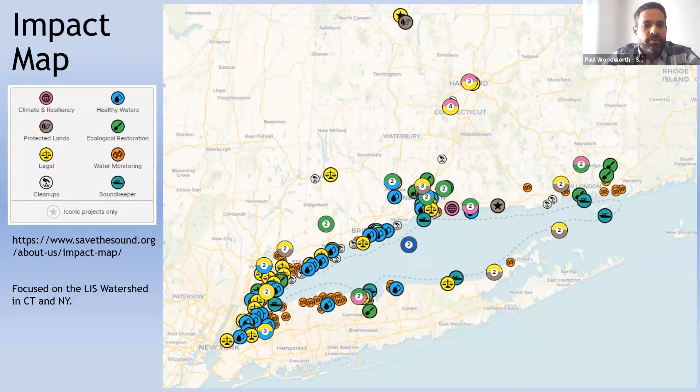We are a geographically focused organization, so we are focused on the Long Island Sound watershed in Connecticut and New York, which includes part of New York City, the Bronx, Queens, and parts of Long Island, the North Shore of Long Island, and all of the state of Connecticut. And of course, the watershed goes farther north, but we pass off responsibility to some of our partners that do more work in the upper parts of the watershed. So we are very focused in Connecticut and southeastern New York.

Our ecological restoration team has a handful of approaches we're currently most focused on. These are roughly broken down into watershed planning and stormwater green infrastructure type work, dealing with non-point source pollution, rain gardens, and infiltration. We also deal with coastal resiliency and living shoreline type projects involving marsh restoration, oyster habitats, and a new experimental phase of eelgrass habitat restoration. And the work we're also very active in is loosely called aquatic connectivity and fish passage work.

That's primarily road stream crossing assessments, looking at culverts and dam removal, which is the focus of today's talk. If anybody has any questions as I'm going, feel free to raise your hand or interject, maybe to the chat.

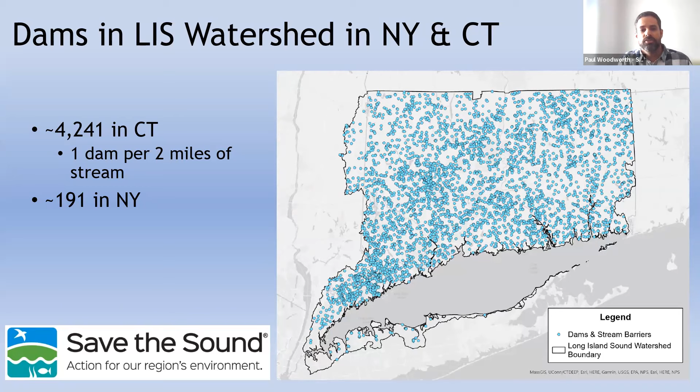And it's not atypical. Massachusetts has some portions of the state that are even more dense, and much of southern Maine through New England into the mid-Atlantic, and even some southeastern states, have similar densities and settlement histories that drove the establishment of so many dams.

So from that, we have to emphasize that not all dams are created equal. Most dams have a single function, and they vary widely. We have hydroelectric dams - this example here on the Housatonic River.

This is such a sizable structure, the dam has a name, and the pond or lake behind it has its own name. Sometimes people know the lake but don't know the dam. It's such an enormous footprint on the landscape, and that is an active hydropower facility. It has a power generation unit, connected to the grid - you see power lines coming out of it. Very big, very powerful, and providing a very valuable service to society.

To the right of that, we have a water supply reservoir on the east branch of the Farmington River. This is a beautifully maintained, beautifully built, enormous structure, with massive amounts of water coming out of it and basically being funneled to the Hartford region. So a valuable resource here.

To the lower left, we have a flood control dam. This one in particular is the Mad River Dam, just upstream of Winsted, built after 1955, when the flood of 1955 destroyed Winsted. And those dams also are very large on the landscape.

However, the vast majority of those dams I was looking at on the map previously are basically relict dams that were hydropower technically, but not hydroelectric - never really electrified, just formerly what we call hydromechanical. They were basically connected to a mill dam or mill powerhouse and used for either cutting lumber, grist milling, or textile mills - that sort of activity over the years since colonization and through the Industrial Revolution. These distributed power sources were essential to early American colonial history and expansion.

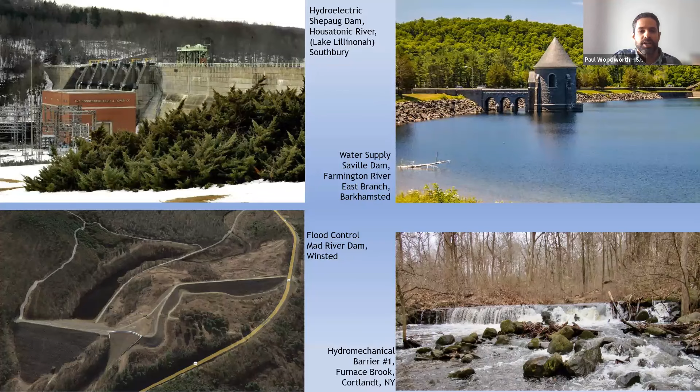So these are the kinds of structures we most often look at. The fact that this dam is only 5 feet high, not much taller than the average person, doesn't matter from a fish's perspective - it is still a complete barrier to fish migration. So we still look at these structures as having a pretty detrimental impact on our systems, and I'll get into more of that.

The ownership of these dams is also a pretty interesting phenomenon. You see the vast majority of these, 75% or 78%, are in private hands. Some of them are tribal, although that's a very small percentage. Also a very small percentage are federally owned - that's usually an Army Corps structure, a flood control dam.

Some are in public utilities. I should tell you that this dam database, and actually the map I showed you, did not include water supply reservoirs. Those are not even mapped, for public safety reasons.

Everybody can easily find it out, but it's not something that's put up for easy download and viewing by Connecticut Dam Safety. A lot of this information is publicly accessible. You can go onto the Connecticut DEEP's website for dam safety, download the database, and see it. They also have a really good viewer, where you can pan around the state, zoom in and zoom out, just like Google Earth or Google Maps, and find a dam in your neighborhood and learn some basic information about it.

I have two pictures here. One on the right is actually a dam on the Bronx River. It doesn't have much of a name or purpose anymore, but it's still a full barrier to fish migration. The one on the left popped up in one of our culvert assessment projects, where it was looked at as basically a culvert under a road. But actually, that drop structure with water falling into it connects to a culvert that goes under a road, and technically that is a dam, sure enough it's on the dam safety database. So that's another example of a fairly small structure that is still considered and regulated as a dam.

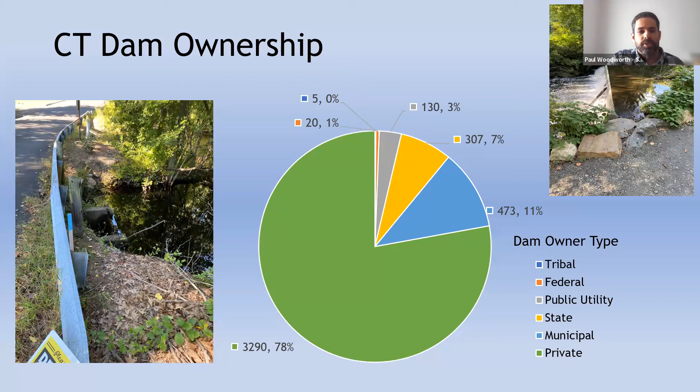Dams are regulated by the state. They are given hazard classifications, based on how much damage would occur if the dam were to suddenly fail, such as damage to land, roadways, or structures, possible loss of life, or economic loss. Connecticut DEEP has a lettering system unique to the state, but the general breakdown is similar: negligible at the lowest end, then low hazard, moderate hazard, significant hazard, and high hazard dam.

You can see from this chart that most of these structures, about 45%, are low hazard. Another 12% are negligible, 17% are moderate, and just a very few are actually in the high hazard classification.

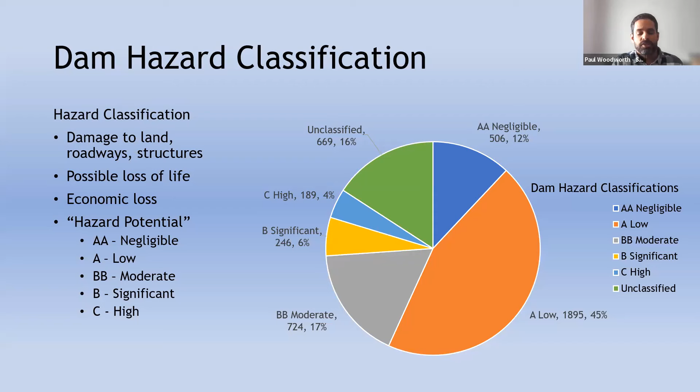I should be very clear here that hazard classification is a very different thing than the condition of the dam. It's not something that says this dam is not good, so it's a high hazard for that reason. High hazard really has nothing to do with the actual condition.

So those two concepts are separate but related. Typically, to establish the condition you'd hire an engineer. They would look at the spillway, the abutments, the earthen berm, the appurtenant structures, the raceways, anything associated with that dam, and look for signs of failing concrete, cracking, spalling, vegetation growing on an earthen section of a dam, or sloughing of the soil anywhere, and then give it a rating of good, fair, or poor condition. Let me know if there's any questions about that. I'm going to keep moving on.

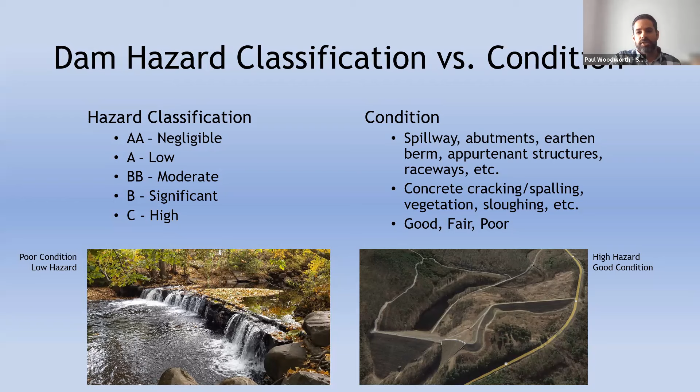Dams impart an impact on the landscape. I've broken them down into fields of science, which may not be the most receptive framing for an audience, but hydrologically and hydraulically, they basically alter the flow regime. They stop water, turning a flowing river into a linear impoundment or some kind of a lake, so it drastically alters the hydrology and hydraulics of a site and of a watershed.

They also have a geomorphic impact. This happens to be my area of interest, so I like to talk about this. Dams trap sediment and don't usually allow sediment to convey downstream. That sediment accumulates in the impoundment, along with any contamination that might come with it, burying the substrate in the impoundment. The downstream effect is a cascading effect of sediment deprivation. Streams need to carry water, sediment, and organic debris, and if you cut off the sediment, that results in a sediment deprivation condition that starves the downstream reach.

It's sort of a sediment-starved scenario, and it actually exacerbates channel erosion downstream of dams. So that's a downstream and an upstream effect.

The other effects are physical, chemical, or water quality related. They tend to increase temperature, they tend to trap water, and they make it more slower moving.

They give it more exposure to the sun, so that increases the temperature, and that also has the effect of decreasing its dissolved oxygen. Most aquatic organisms consume oxygen through respiration, through gills or something similar, and if you have deprived dissolved oxygen, then you're going to have an ecological impact in that way too.

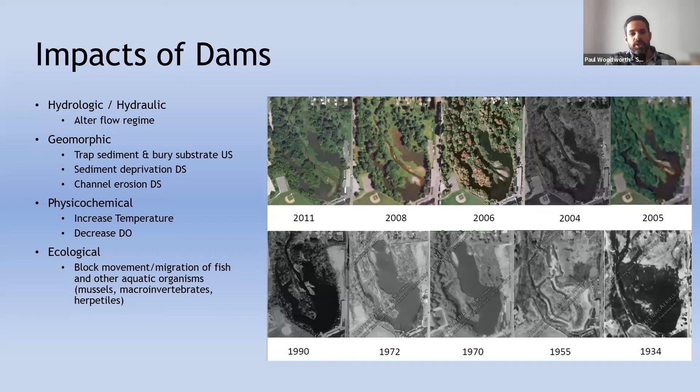Now, converse to that, with all those impacts related to dams, dam removal can actually reverse a lot of that. By removing a dam, you get an immediate response in terms of restoring free-flowing conditions.

You can uncover river habitat, and you can start restoring river habitat downstream by restoring the flow of sediment. You can reduce temperature and increase dissolved oxygen, and you almost immediately restore the movement of resident fish and the passage of migratory fish.

Many of our projects are being funded with the intent to restore populations of migratory fish in our area. We have 5 primary migratory fish that we are focused on: American shad, blueback herring, alewife, sea lamprey—which are native to the northeastern coast—and American eel.

So those are the species that we are often looking at in terms of trying to reestablish fish runs and reestablish their populations in Long Island Sound.

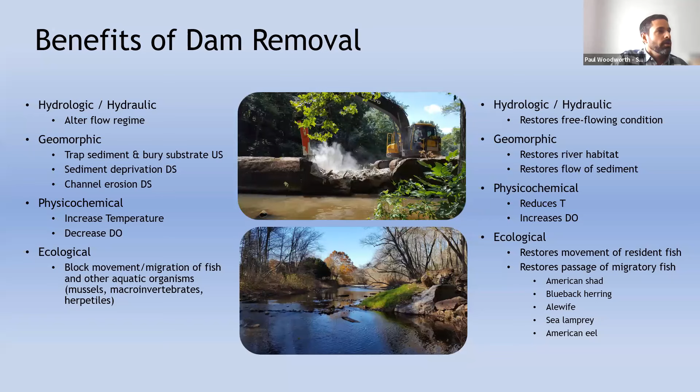Related to those benefits, we see dam removal as ecological restoration. Ecological restoration is being spearheaded on a global scale by the Society for Ecological Restoration. Several of my colleagues are members of that; we're in the Northeastern chapter.

This is the organization that has risen to the moment in terms of establishing standards for ecological restoration, definitions for it, and guidance documents to try to measure and improve upon the science and practice of ecological restoration.

They define ecological restoration as the process of assisting the recovery of an ecosystem that has been degraded, damaged, or destroyed. Ecological restoration aims to move a degraded ecosystem to a trajectory of recovery.

I think it's important to note that dam removal doesn't necessarily immediately restore an ecosystem. It's going to take many actual dam removals to set the river back on a trajectory, to get fish populations back up to where they were prior to the damming era or dam-building era of the Northeast.

So it's a long-term process that occurs long after the yellow machines have left the site.

To convey some of this, we look to this ecological recovery wheel, which helps us identify the positive impacts that dam removal can have. It can have a dramatic impact on species composition, structural diversity, ecosystem function, and external exchanges.

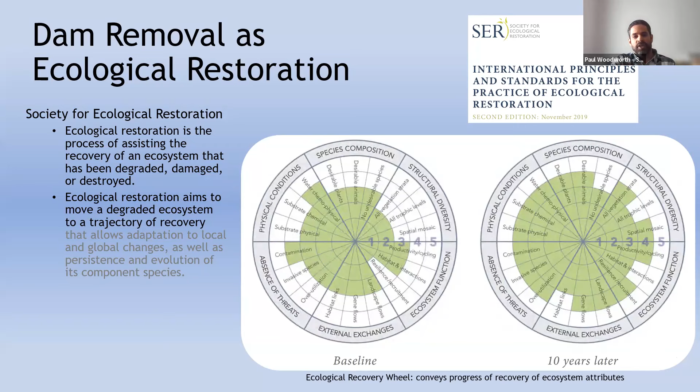So now I'd like to move to some of the projects that Save the Sound has completed, some of our successful projects. These happen to be ones that I worked on when I was in consulting too, so I have a little bit of overlap with them.

This is the Clark Brothers Dam on the Quinnipiac River in Southington, Connecticut. This is the lowhead dam I've been talking about, in decrepit condition. To the right is a picture of that exact dam post-removal, with the river flowing through and the structure out of the way.

This is an aerial view. The aerial to the left is with the dam in place, and the aerial to the right is with the dam removed. You probably can't even tell where it is. I'll give you a hint with my mouse right here, but this is the dam right here, and this is a bowling alley right to the left of it.

It's a very sinuous stretch of the Quinnipiac River, except for this stretch that was most definitely straightened at one point, probably during the creation of that highway. The removal restored passage to the site, but had very little impact in terms of the loss of a lake or lakefront property. Nothing that dramatic happened.

Because I'm a geomorphologist and was involved in the design process, I love to look at these sites and projects through the eyes of the river profile. It's a very explanatory, powerful tool for estimating or evaluating the impacts of a project and predicting how the river is going to respond.

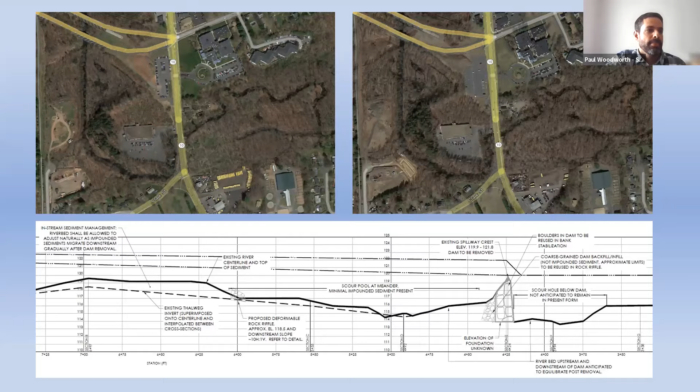I'm going to switch now to another project. We call this the Hyde Pond Dam removal project. This is on Whitford Brook, on the border of Groton and Stonington, and actually a little bit of Ledyard. So it's right up there.

Whitford Brook had been known to have a really strong fish run, including sea-run brook trout and sea-run brown trout, but also the migratory species I was speaking of. It actually had a fish ladder on it—you can just barely make it out in this photo. However, the dam was in such poor condition, leaking so much that even at low flows there was barely any water going down the fishway. So the fishway was ineffective because of that aging structure.

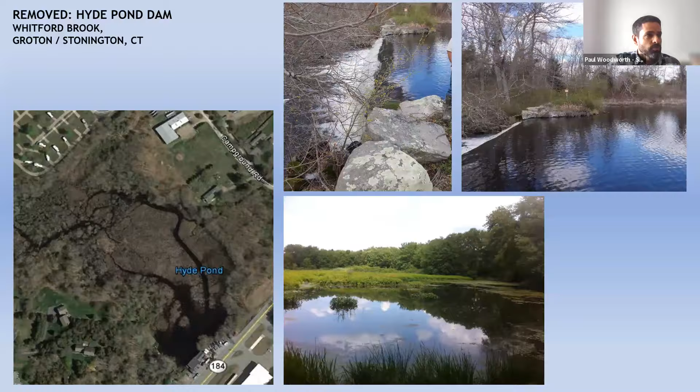With that in mind, the fishway was removed to be relocated to another place where it could do some good. The dam was then removed through a multi-stage construction process that involved a lot of sediment management, or partial excavation of sediment. This excavator has pipes diverting flow around it, excavating sediment out of what was a pilot channel and placing it up on a floodplain spot behind it. That area was then replanted, somewhat by the contractor in charge, but mostly by Save the Sound and volunteers afterwards.

This is an example of what the site came to look like soon after. This was a pretty interesting site, different from others. Let me back up and move ahead here—this is a series of aerials of this site.

This aerial represents right after dam removal. The pilot channel had been excavated, but notice no activity—we didn't propose to do any work up into this area. This is a situation where the dam had been much higher than it was today. A lot of sediment had accumulated over the hundreds of years it had been there, and that sediment had become very densely vegetated. It basically formed a stream-wetland complex, meaning this was a stream and a wetland that are very hard to distinguish from one another.

Rather than proposing what I would call a heavy-handed approach of excavating a whole new channel up through it, we agreed to excavate only some sediment and allow the site to adjust passively over time. This sequence of aerials—2016, 2017, and 2018—shows how minor, slow, and gradual the transition on this site has been. It still remains a very vibrant wetland. Some regulatory agencies had concerns that removing this dam would drain the wetland.

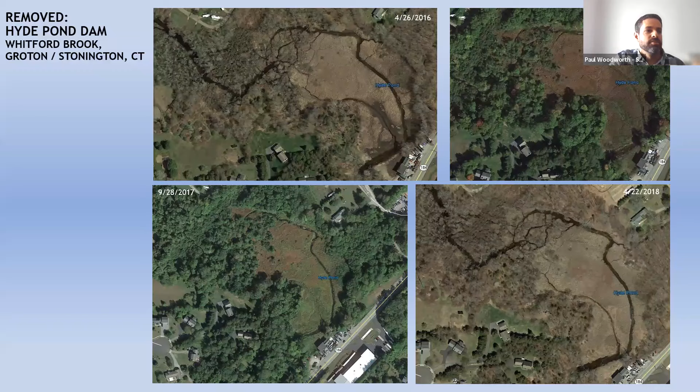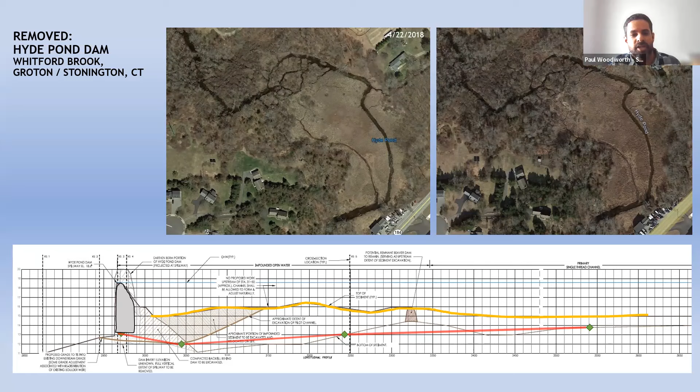So those are two projects that we've completed, and now I just want to touch on a couple of the apples of our eye, the projects we have active right now. We're working on the Kinneytown Dam project on the Naugatuck River. This is in Seymour and Ansonia. It's a beautiful part of the state. The Naugatuck River is actually a tributary to the Housatonic. It's actually the largest river entirely contained within the state of Connecticut, for whatever that's worth.

This is a hydroelectric dam, but it is defunct. It hasn't been operational for a number of years now. It's changed hands through several operators that have failed to find a way to make it work. Running a hydroelectric dam is a lot like buying a house - you've got to find a way to pay off the mortgage within 30 years. And if you can't make the numbers work, then it's not economically viable. Several operators have gone through that process and said, okay, this is a done deal.

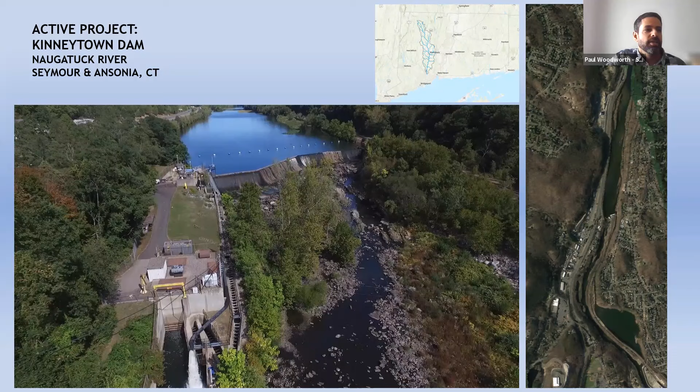And so now it's an effort on our part. We're teamed up with quite a few organizations to try to remove this dam, and it's going to take some time because it's a very complicated project. It'll be the first of many - many firsts in this state, because it's the first dam currently managed by FERC, the Federal Energy Regulatory Commission, that will be attempted to be removed in the state. So it'll be an interesting endeavor, and it's going to be a long-term push.

I wanted to talk about the project timeline it takes, because these projects take a long time to get going. So these are the steps I kind of identified. We first identify projects - looking at a map, talking to people we know, or being out on the ground itself - and do a general high-level assessment of feasibility: is this something that could actually be viable? We assess community interests and concerns.

We try to identify a landowner and approach them and say, is this something you would be okay with, assuming this is in private hands? We talk to the partner agencies, the regulatory agencies - is this a priority for you? Would you be receptive to a permit application if we were to propose this? Then we try to scope out the cost to do an assessment, a design, permitting task, engineering investigation, and we also estimate those costs.

From that information, we then start to apply for funding. So there's a handful of steps that need to happen before we even get funding to help support a project, and that's where private donations come in - they help us seed these projects and get the first ball rolling. After we get funding, assuming we win a grant, we issue requests for proposals, contract and hire an engineering consultant that conducts site investigation, data collection, and preliminary design.

We may then need to apply for more funding to push it to 90% design and permitting. That gets submitted to the regulatory agencies. Agencies have lots to say in these projects - their comments, their permit conditions, everything else that comes out of that turns into the 100% design. At that point, it's shovel ready. So here we are at step 14 of 18, and we have a project that's shovel ready. There are lots of funding programs that like to only fund shovel-ready projects.

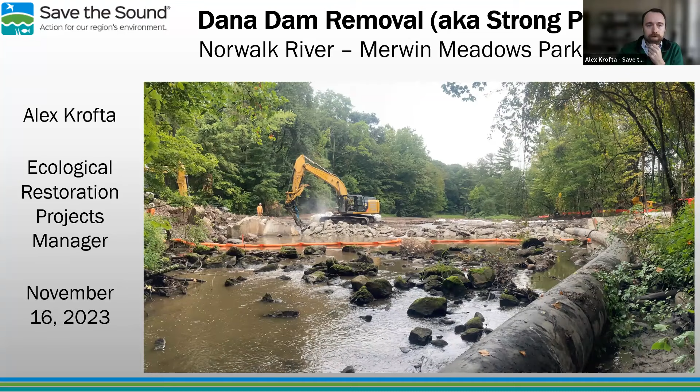Okay, so talking about a little bit of watershed context here. Dam removals are not as impactful in a vacuum, so we look at the entire watershed. There had been a previous dam removal downstream and another dam removal upstream of this site. So there was a lot of habitat that could be interconnected with this removal of Dana Dam here in Wilton. And we already know that these migratory fish, these diadromous fish species, are present in the Norwalk River all the way upstream from the Sound to Wilton, to Merwin Meadows Park.

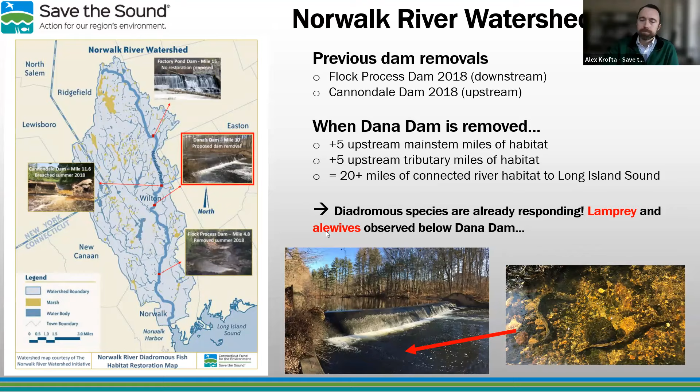So quick overview of kind of the general design features of this project. What we're doing is going from a slightly over-widened impoundment. It's a run-of-the-river impoundment, so it's not big and wide like a big giant lake, but it is wider and obviously slower than the natural flow of the stream. There's a small upstream island, the primary channel along a stretch of railroad embankment. And there was, due to the shape of this valley, minimal wetlands formed along, with some riverine emergent habitat and scrub habitat.

And what we did was we removed the dam and created a single channel. We realigned the channel away from the stretch of railroad embankment. We installed riffles, and we did restore, or retain, or recreate some bits of wetland along here. And also by narrowing the width of the stream, we added new riparian buffer habitat, which is good for habitat, water quality, and things like that.

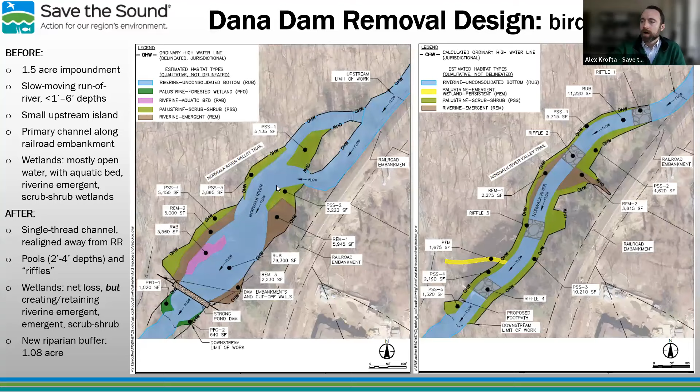For this sort of horizontal channel definition and containment, we used bank armoring—kind of like riprap style banks, but the voids are filled with soil and planted with various native plants, native seeds, as well as shrub live stakes. The idea is that those banks will hold the channel in a stable position, but also create habitat and grow, not just be a uniform rock bank along the stream channel.

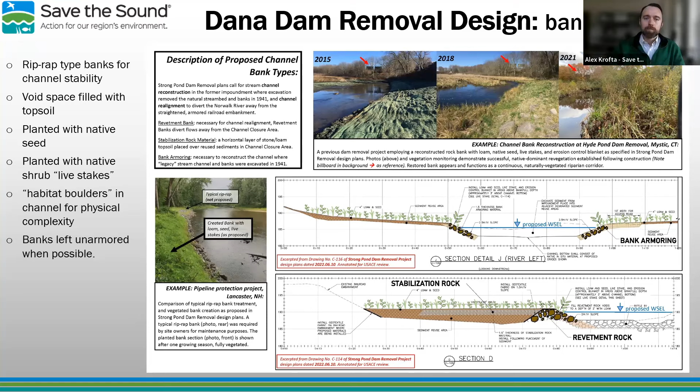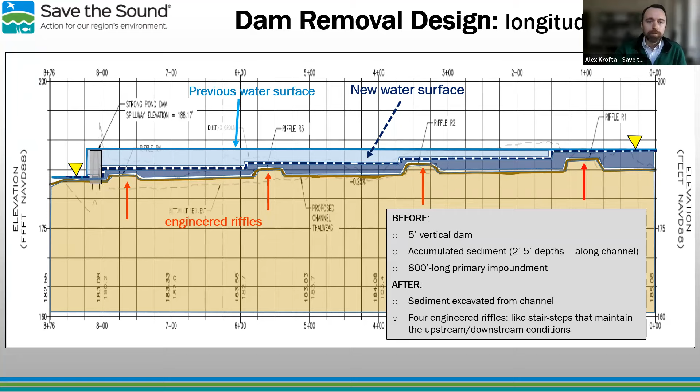Now the river follows this dark blue dashed line over a series of engineered riffles. I'll explain more about those in a minute, but basically what those riffles are doing is stepping the stream channel down. Notice these two yellow triangles pointing out the water surface elevation below and above the project site. The key of this design was to keep those the same—so basically you're stepping the water down from above the project site to below it.

Those engineered riffles are just kind of like rock steps or rock ramps. You can see, it's probably not too perceptible here, but that dark dashed blue line is actually going down at a slight slope. So it's holding the water at a high elevation above and then dropping it down, but not quite so steep and not quite so vertical that fish can't swim up it.

We're also including rock boulders in that riffle to create different flows and habitats for fish, and then a low flow channel, so even at lower flows fish can get upstream. What that ends up looking like on site is just like a little rapid—you wouldn't notice that that's an engineered structure unless you were really looking for it.

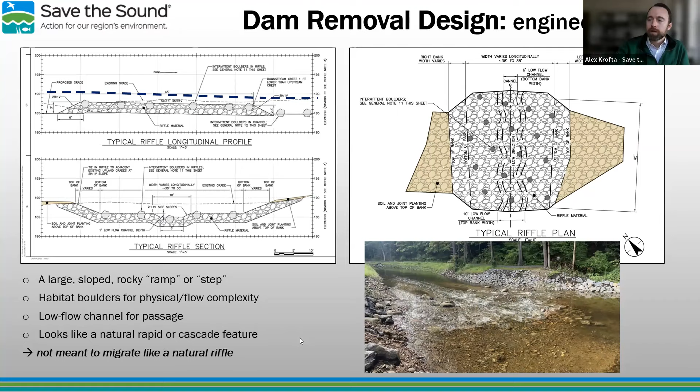Our sediment contaminant levels were not too high here. There was no human exposure risk. There was some environmental toxicology or toxic risk, so we worked with DEEP to get this sediment management plan approved. This is done with minimal risk to the environment.

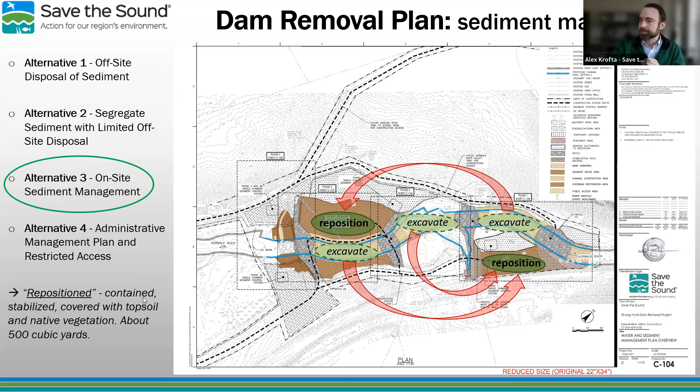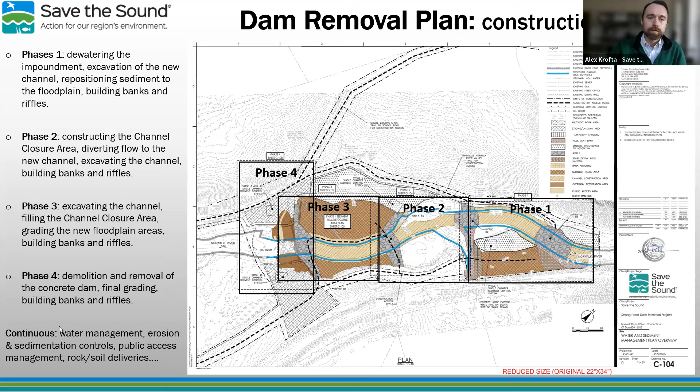This probably seems like a heavy-handed approach—lots of rock, lots of excavation, lots of manipulation of the channel here. The reason that's so necessary is because when this dam was built in the 1940s, they didn't just build the dam, they actually excavated the impoundment to create a deeper pool for recreation.

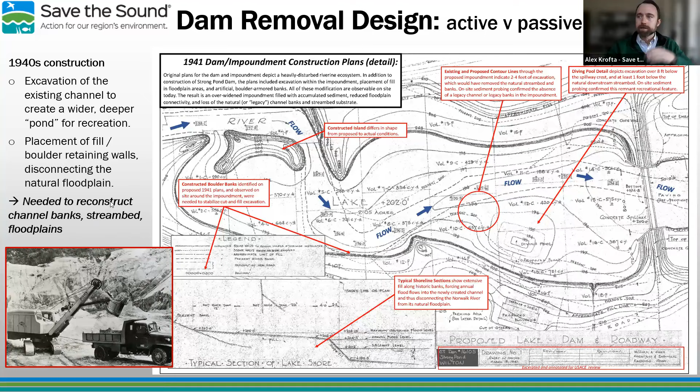The other really important thing that required us to use a lot of rock and heavy engineering is just the proximity to critical infrastructure. At the upstream section of this impoundment is that railroad embankment I was telling you about. We could just remove the dam and the river would find its own channel and path, because that's what rivers do. But because this is such an important piece of infrastructure, we can't allow that to happen.

So we need to really get the river into its place and make it kind of like a static system as opposed to a dynamic system, which rivers naturally are. You might think we're only worried about things downstream, but changing the flow can actually adjust the erosive patterns upstream. That's why we were really concerned about this, and that's why we moved the river away from the railroad embankment. We wanted to keep that water surface elevation exactly the same upstream, so there was no impact to this feature.

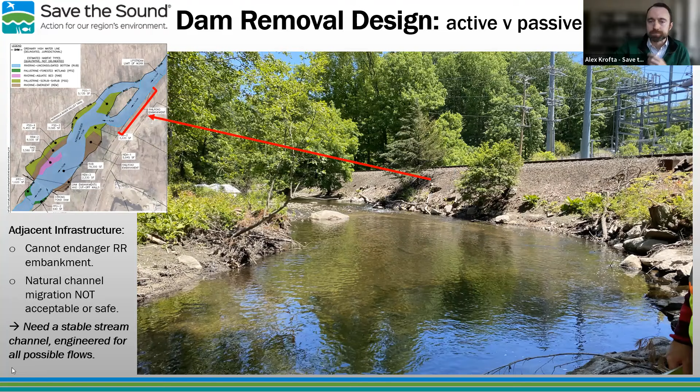2019 is kind of when we got on board and started doing this work, but other partners had been laying the groundwork for this dam removal for about a decade or more before then, getting folks up to speed, getting the public involved and engaged and excited about this project. So I'd say this was an even longer timeline - this is just our timeline.

I don't mean to say it was all bad getting to this point, but a lot of this stuff has no celebration event - setting up meetings, getting people to the table, getting permits approved, calculating flow speeds. There's no celebration event for that, but that's what it takes to really get this work done.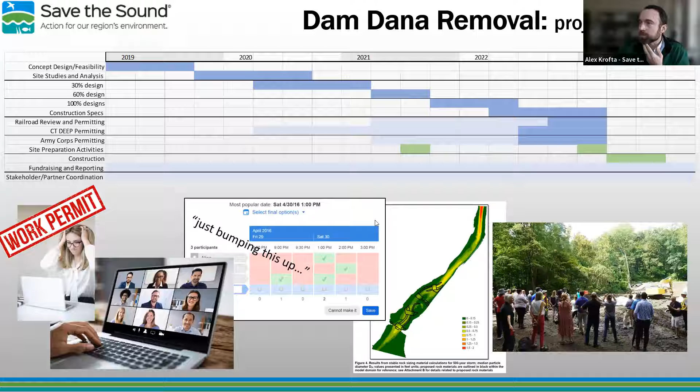So construction - that's the exciting part, so we're going to talk about that now. Water management, as I said, was the major component of doing this work. It's in a flowing river, so you've got to take care of the water coming downstream, and that water level can change based on the rain. Some of the main things this entailed was notching the dam, but leaving it in place, so that we could let more water out from behind the impoundment and have a drier condition to work in.

Using these - and when I say we, I really mean the construction contractor who did that, I believe they're on here, Chad from Sumco, so feel free to weigh in on any of this construction stuff if you feel it's needed - these are just big giant sandbags used to create a temporary dam around a work site or a section of work. This is a big conduit pipe that passes the water through the area you're working, and then you pump it out so you can have a dry or dry-ish section to do the work you need to do. This is the pipe discharging below the work site.

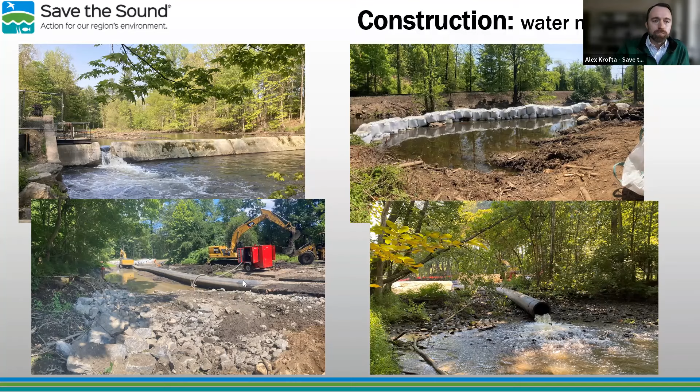You can see that dam is still in place till the very end. Leaving the dam in place to the very end was important because in case flows did come up, which they did a few times, it was more like filling up a bathtub and flooding the site rather than a torrent of water with a lot of energy moving through that site with no dam in place to backwater it and slow that flow.

So excavation and repositioning sediment - like I said, this is removing or over-excavating that new channel along the other side of that island so that we could pass the proper amount of flow through that side.

Obviously excavating around the dam itself, and then placing material in that channel closure area against the railroad embankment because we wanted to move the river away from there.

Oh, that's my alarm. I got to stop soon.

And then spreading topsoil out across this floodplain because we're regrading that area to reconnect the floodplain. You'll see that in a second.

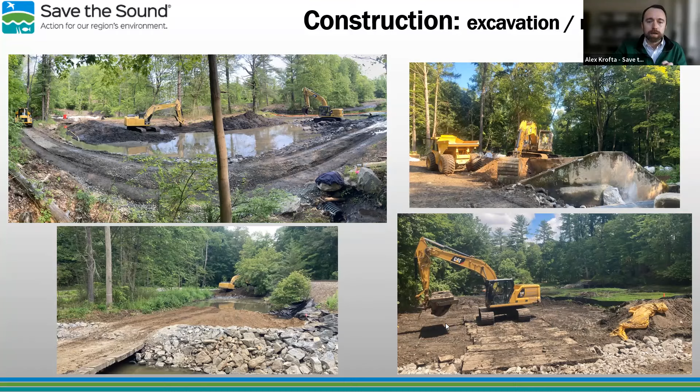The rock features, as I said, they're really important. We brought in a lot of rock. So this is building a riffle out from one stream bank across the channel to the other, and then getting that to the proper elevation to meet the grade requirements. Building a revetment to isolate both sides of that channel closure area.

These rocks that you see all pointed to are very deliberately placed. Those are habitat boulders within the channel, so it's not just an even flat substrate. These boulders create little habitat elements and different flow patterns that fish and other aquatic organisms can use.

Obviously, we're using big equipment to do this, but then you can see this young person here standing, spraying water onto this. That's actually washing in the fine sediments and fine material into those rock features, so they're as watertight as possible. Otherwise, water just flows right through them, and they don't really do what they need to do.

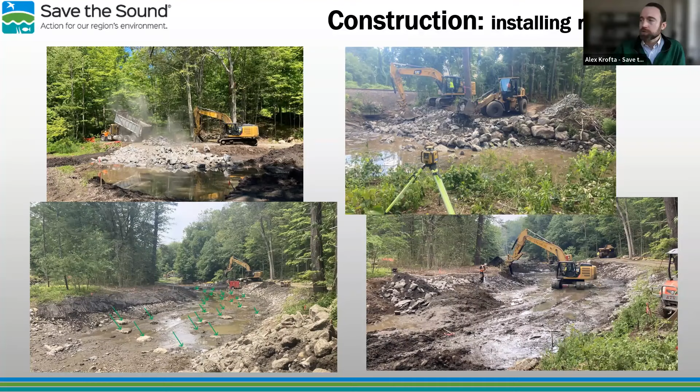So then site restoration, we've got erosion and sediment control blankets, and you can see that a few months later, planted with native plants, it's going nuts, very well vegetated.

This is one of those floodplain areas. We've got erosion and sediment control mat on an area that we really needed to hold in place. And then we've got hydro seed and some large woody material. Again, native plants spread all over this area.

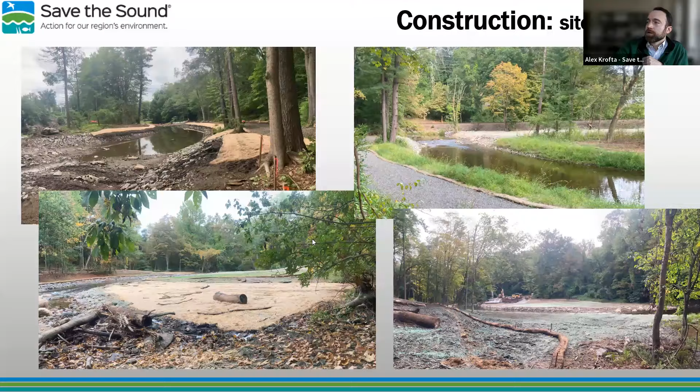But yeah, they just walk out with an excavator with a jackhammer on the end of that arm and smash up the concrete and put it in trucks and take it away. No dynamite is involved, no matter how many times people ask us. That would not have been permitted by Metro North, certainly.